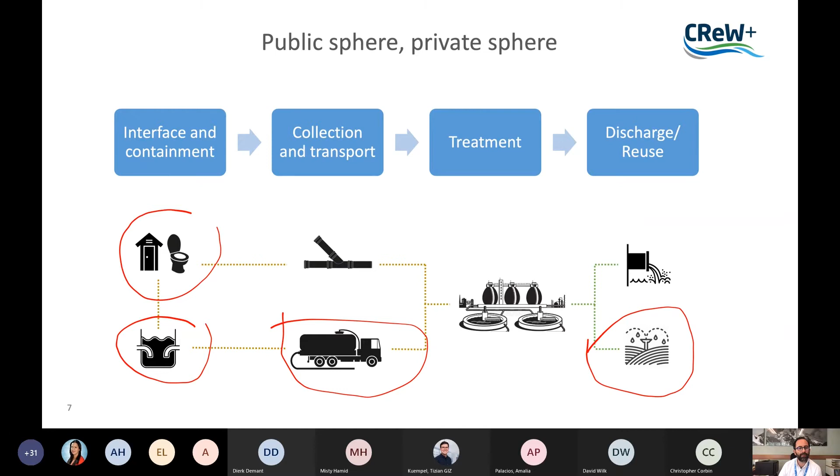This is the typical centralized solution—it can be either centralized or distributed. But on the other extreme of decentralization, we have on-site solutions in which everything happens in one place: a hospital, a school, or even a single household, where we have the interface, containment, treatment, discharge, infiltration, and reuse.

The only link of the sanitation chain that we don't have here is collection and transport—everything else happens in one place. So all of this is happening within the private sphere.

But the infiltration of treated wastewater at the household level, or on-site infiltration of treated wastewater, will affect underground water resources. Underground water resources are a public good, and it is in the public interest to protect these water resources.

So even when we have on-site solutions, we still have participation of the public sphere in protecting health and the environment, specifically underground resources.

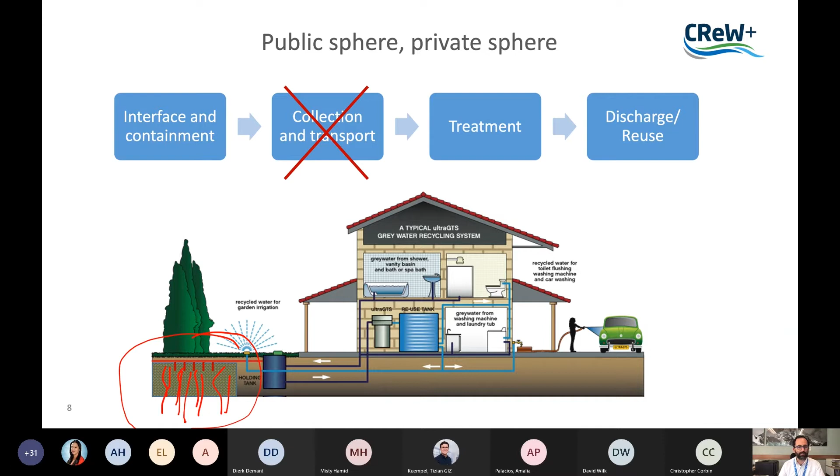First, we can find some opportunities to recover scarce water resources, nutrients, and energy through good reuse practices.

Second, dialogue and coordination between different actors from management of services is vital for the success of sustainable wastewater management. Public-private partnerships can improve service delivery, efficiency, and encourage reuse activities.

This is the kind of experience we have with farmers, for example, or industry, when we can do reuse of treated wastewater in industrial processes, then we're encouraging this type of activity. It's a win-win situation in which the industry or the farmers can get water at a low cost, and in some cases with a plus, like nutrients. And the utilities can treat the water at a less stringent level when we're going to reuse for specific activities.

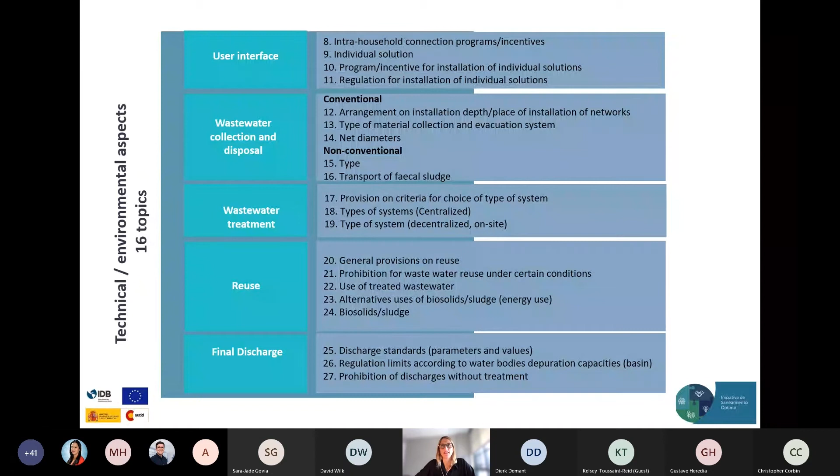And third, and finally, the planning and economic and financial aspects of the legislation were identified, considering subsidies, if there were any type of information identified in each country regarding subsidies, the connection incentives that were in place, a structure of tariffs, and which kind of planning tools were in place.

All these 38 aspects were summarized in a huge Excel matrix that we shared with some countries in certain cases, and we were able to validate some of these results and identify whether any law or resolution was missing too.

So after that analysis and pre-identification was done, we went to phase 2 of the study and performed a more detailed analysis of six identified and selected countries. The scope was to go further into the gaps, similarities and differences between those countries.

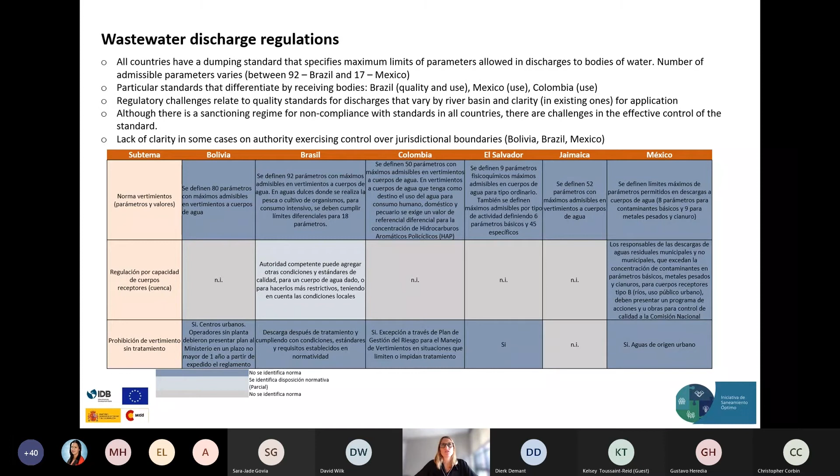Therefore, it's also another challenge to address and compare in general, or to extract conclusions in general. But we are clearly able to see and highlight the big gap in regulations and legislation that we are seeing

in terms of reuse of wastewater and sludges. We definitely are seeing that there is not a clear legal framework to promote circular economy in the sector, and therefore it's an opportunity and a challenge to address in the future.

Also, in terms of individual solutions, we were able to see that this is also a gap, an institutional gap especially. Although most countries have standards that define these kinds of solutions, there is not a clear institutional framework or legislation regulating how safely this service is being provided and how secure individual sanitation is, not only for the people but for the environment as well.

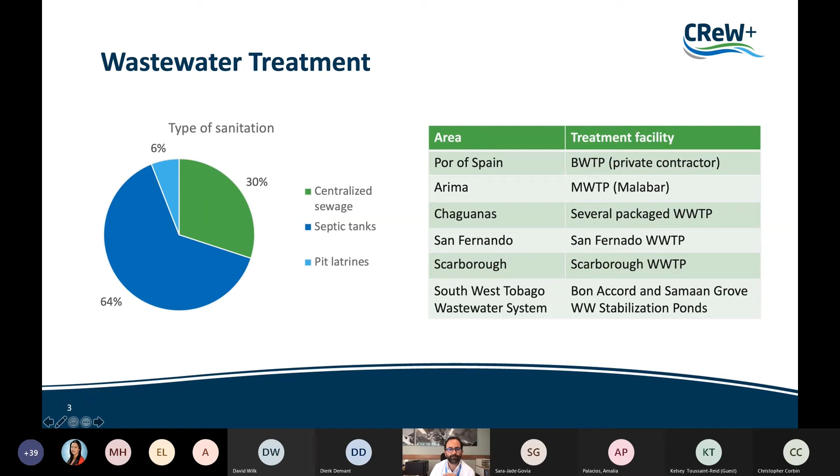The Water and Sanitation Authority of Trinidad and Tobago is responsible for the collection, transmission, and treatment of wastewater. There are 44 wastewater treatment plants owned by WASA and 18 contracted wastewater treatment facilities. So the coverage of wastewater treatment is around 17% compared to peak demand.

The unit cost of water production is $4.84 per cubic meter. This is interesting to compare to the cost of desalinated water, which is $9.95 per cubic meter, assuming 25% of non-revenue water.

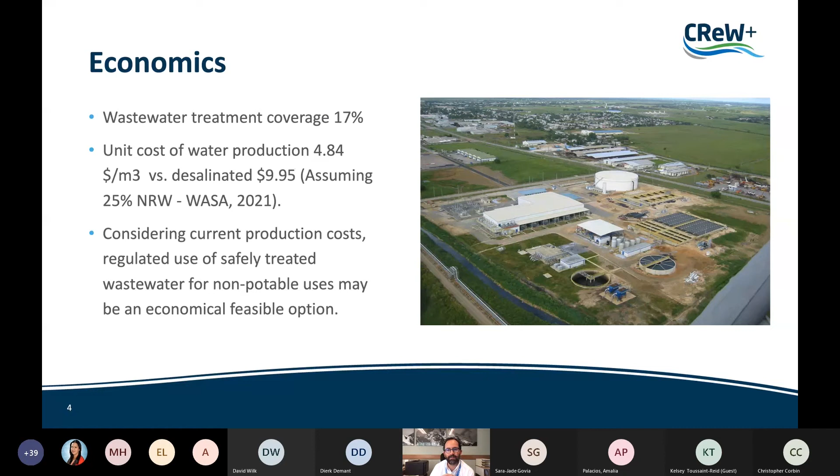Considering the current production costs, regulated use of safely treated wastewater for non-potable uses may be an economically feasible option. So here's the huge opportunity of reusing water if we take into account the very high cost of desalinating water.

Wastewater reuse is a fairly new concept in Trinidad and Tobago, so it's not widely acknowledged. According to their master plan, there are 30 sewer sheds — like watersheds, but for sewer, distributing water across 30 different areas. The Water and Sanitation Authority recognizes the following requirements: first, the integration of existing systems, the integration of new developments, and the integration of unsewered areas. Those are the challenges they face in integrating all these different areas.

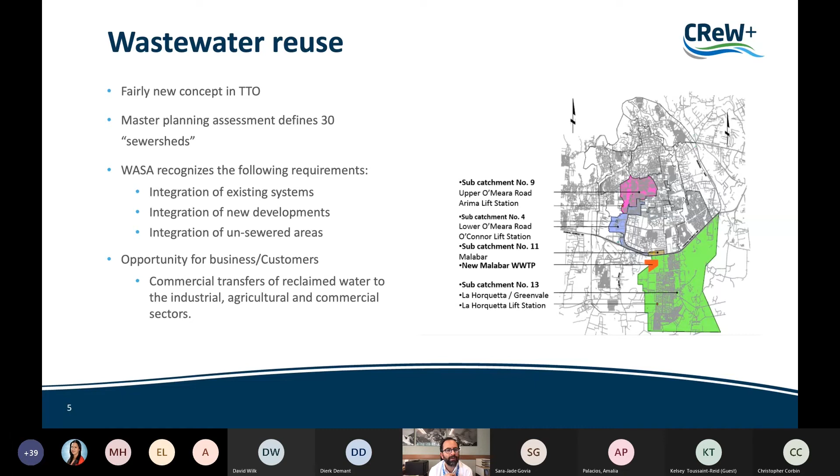There's an opportunity for businesses and customers in commercial transfers of reclaimed water to the industrial, agricultural, and commercial sectors. There are policies, legislation, and regulations in place. Here are some examples specifically addressing wastewater reuse cases, such as the master plan policy.

This is from 2008. There's also a policy for pollution control from 2009, and the development of wastewater alternatives, also from 2009. All three of those policies are from the Water and Sanitation Authority. Then from 2008, we have the National Integrated Water Resources Management Policy, followed by upstream effluent management, national environmental policy, and finally an implementation strategy for the master plan. So this is a short list of policies, and there are also some regulations and legislation addressing wastewater reuse.

Specifically, the Water and Sewerage Act from 1994, which was updated in 2016, and the Environmental Management Act. And finally, the water pollution rules, which were amended in 2019.

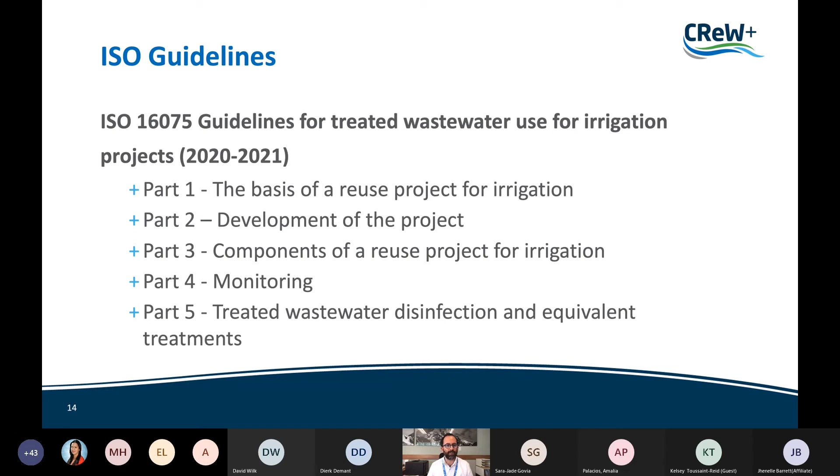ISO 20469 provides guidelines for water quality grade classification for water reuse. This is from 2018, very practical. There are other ISO standards for classifying wastewater in a lot of detail, especially for industrial purposes, using a series of codes to determine specific qualities of wastewater. But these 20469 guidelines are very practical because they basically help you decide whether some treated wastewater effluent belongs to one of three main grades: high grade, medium grade, and fair grade.

These different grades are based on the potential for direct public access to the effluent or direct body contact with it. So in high grade, you have high potential for contact. In medium grade, you have limited potential for direct public access or body contact. And in fair grade, there's no potential—no direct access nor body contact.

Classifying in these three broad groups is a very practical and important tool to decide which kind of reuse we can or cannot do with a specific effluent.

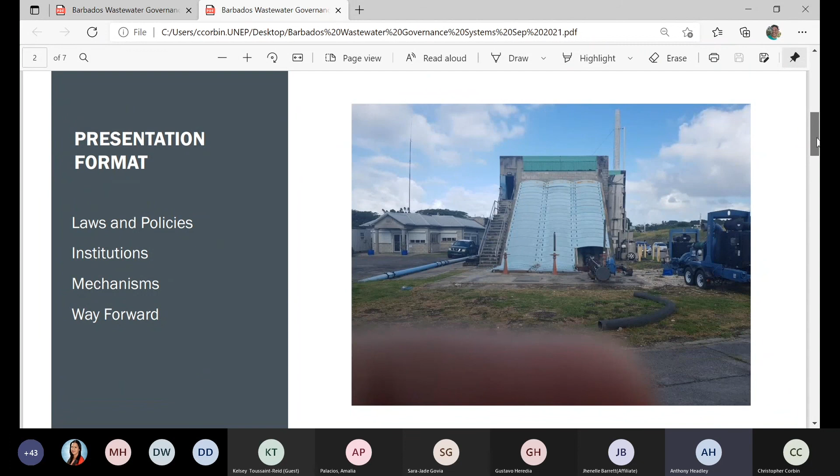The main legal instrument currently in place in Barbados is the Barbados Water Authority Act, Cap 274A. That act speaks specifically to the functions of the Barbados Water Authority, and it outlines clearly the requirements and the things they would have to do with respect to water and sewerage. Specifically, there are aspects that speak to the design and construction of water and wastewater systems, and similarly, a clause that speaks to the authority being responsible for sewage treatment plants that are not part of the authority's current systems.

The other important element within that legislation is the issue of research, as well as dissemination of information to the public. Other supporting instruments include the Health Services Act and its regulations, and the Town and Country Planning Act, which has been updated to the Planning and Development Act, with some provisions to explicitly include environmental impact assessments. And recently, there's an update to the zoning policy, the 2020 version, entitled Water Protection and Land Use Zoning Policy.

That is going to be supported by an explicit piece of legislation, the Planning and Development Act, to be proclaimed, and that new act will bring the zoning policy into force. The importance of the zoning policy is that it was created in 1971 and it spoke to treatment of wastewater in the different zones.

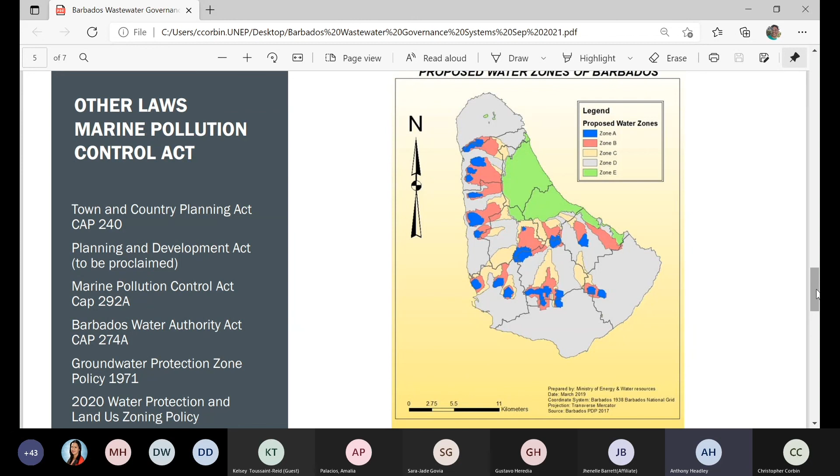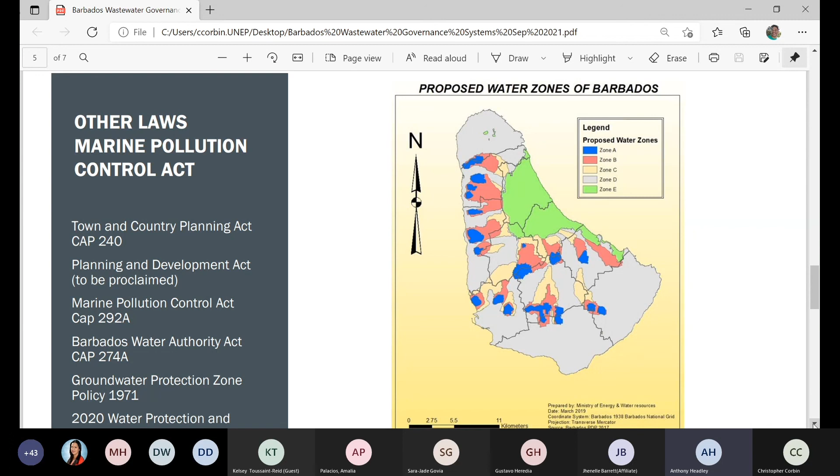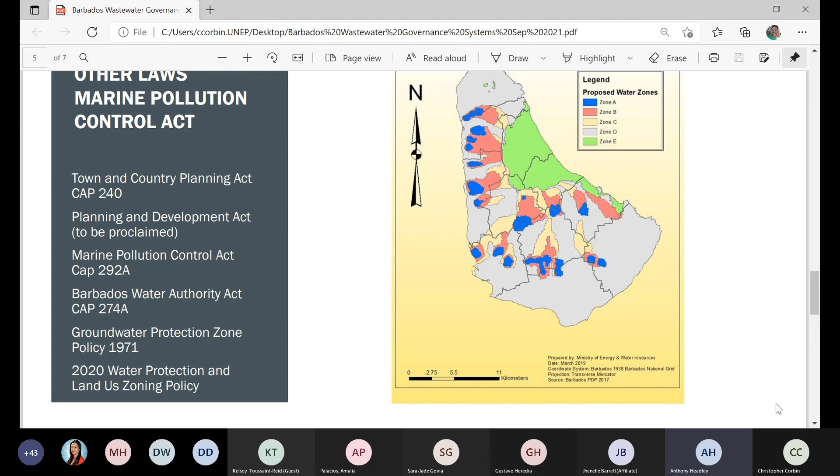So you have all of the players, at least in the government end, sitting together on a weekly basis, discussing the issues, particularly what we are currently doing in terms of upgrading the existing wastewater treatment plants, and bringing into reality the cabinet decision on wastewater reuse. We're going to be upgrading the plants and looking at wastewater reuse within the agricultural sector and potentially groundwater augmentation.

In terms of the way forward, as I mentioned, we're implementing the cabinet decision dealing with water reuse, and a big part of that is looking at communications. So working with the CReW+ project, we are looking at developing a communication strategy, as well as establishing a water reuse fund. That particular study under CReW as well would be looking at the enabling environment for establishing this fund.

The committee is currently working on improving collaboration with the private sector, sourcing funding from the different IFIs, international funding agencies, and that financing would be used to upgrade the current infrastructure to facilitate water reuse. That is our brief presentation. Thank you all for the opportunity.